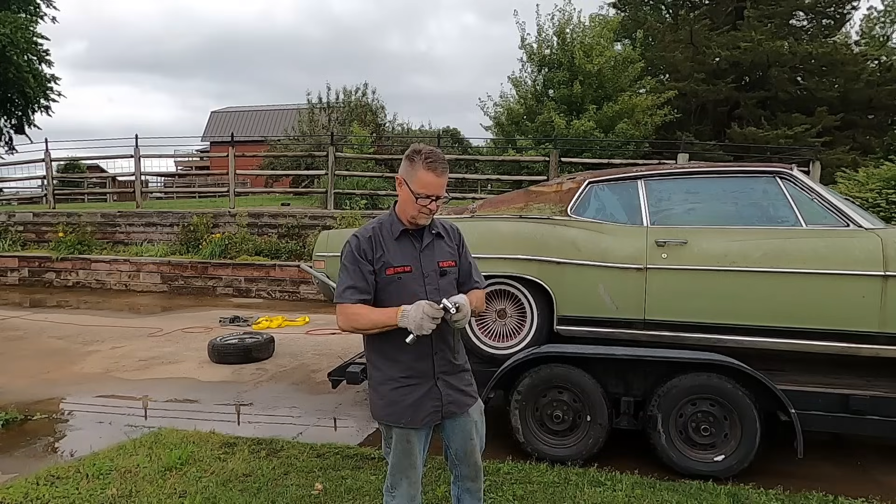It's got a screw in it. Doggone, it does have a screw in it. It's okay, it's all right. Don't cry, I was gonna cry. It's got a screw in there.

I need to tell you what, I'm gonna get these tightened up just with the way it is here. That ought to hold, and then I'll get this tightened up in a while.

This one down here is being not so nice. You know what, I got 4 of them on here good. Well, I thought I did. All right, we're good. Hey, is that rear end supposed to have that much play? I don't know, we'll be looking into that.

All right, hopefully I can get the jack out. Come on, baby, look at there. All right, folks, let me get the ramps out here and see if gravity's gonna take this off.

All righty, Street Rust special. You know what, so I got the winch hooked up still, and as I push it backwards, I'm gonna control it with the winch. I'll be checking to make sure we're doing okay there. Worst case scenario, this thing goes rolling into that Mazda, which gives me an excuse to get it out of here, but it's not mine, it's Gabriel's. Anyway, let's get this thing off, okay?

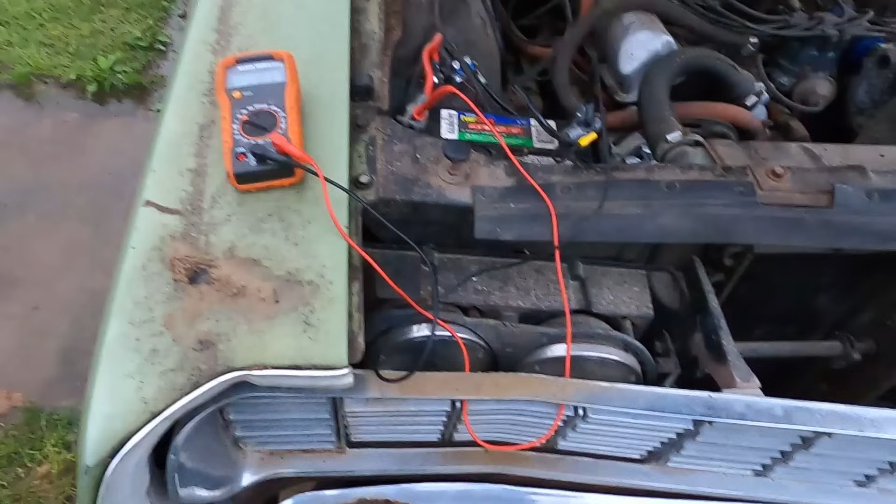We're gonna get back on this tomorrow, but hey, this battery, I've charged it for an hour. I mean, it was at 4.5, now it's down to 2.8. So we're not gonna get this done because I'm telling you what, it's coming again.

So what do we got? We got the Galaxie down. I gotta real quick get this buttoned up, get the tarp back on it. I've got the Mazda there that we're gonna move down below to the other shop, let Gabriel rebuild the engine till his heart is content. So anyway, we will definitely be back on the Galaxie here, okay?

I said Galaxie, it's not a Galaxie, it's of the Galaxie family. It's a 1968 Ford XL. Anyway, we'll get back on this.

Hopefully we'll get a break in the weather tomorrow. I'm off and I'll get all the cars rearranged and we'll get this bad boy going.

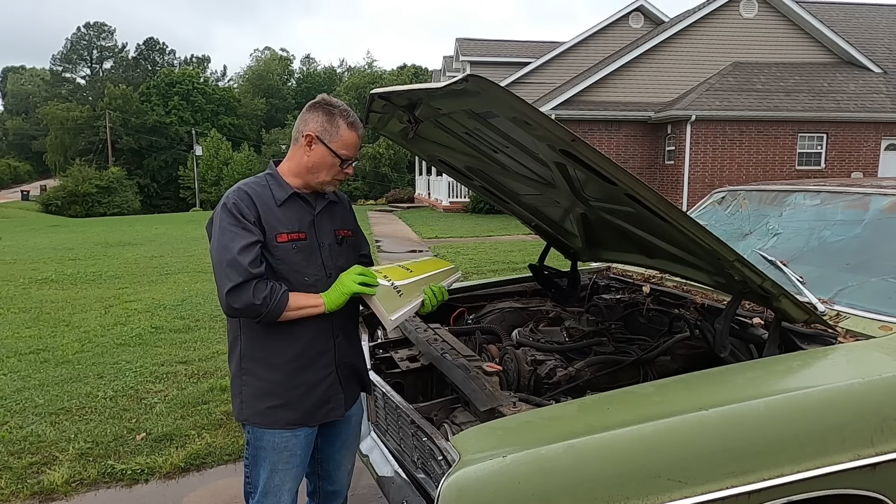So I've recommended, go to Rock Auto. This is the 1968 Ford and Mercury shop manual, a reprint, was 40 bucks. The one for the 1970 F250, I bought the jump drive, was like 20 bucks. I got all the manuals. The information's out there. So we're going to take a look at a couple things here real quick.

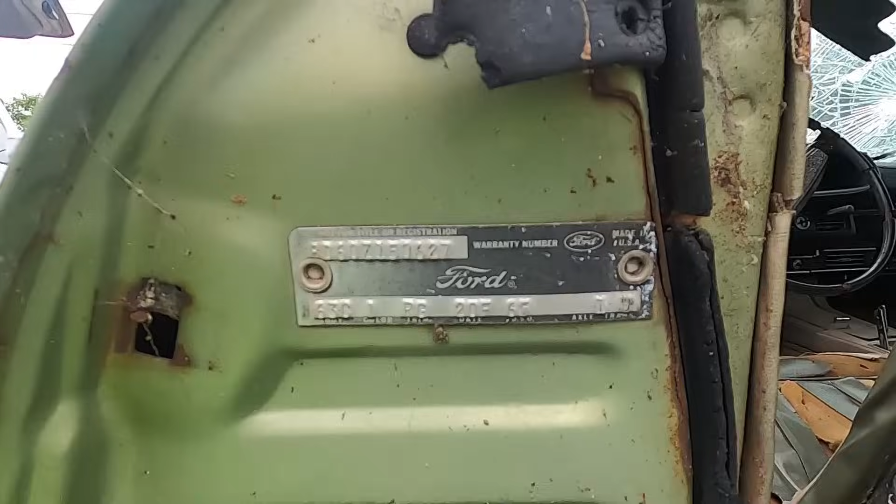I've been under it, I've been in it looking at numbers. So let's look at our VIN right here. Okay, so there's our VIN plate: 8D60Z. Z is a 390 4V, not a 4-valve, but 4V which designates a 4-barrel.

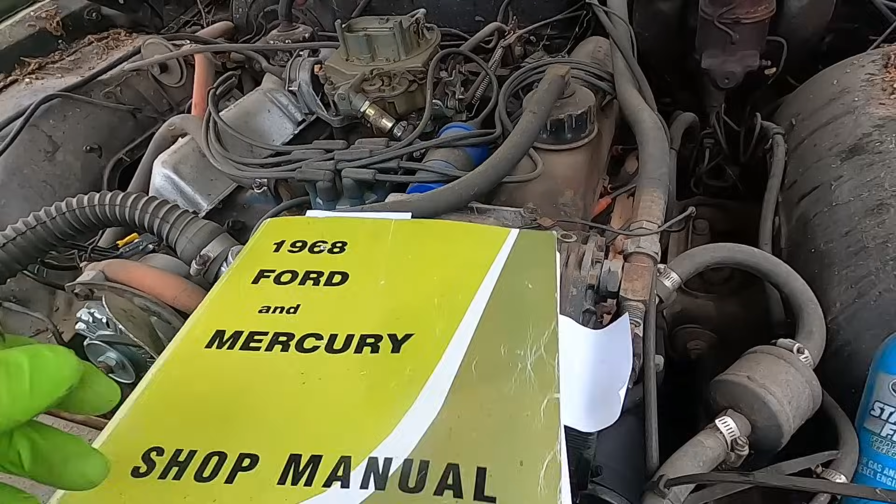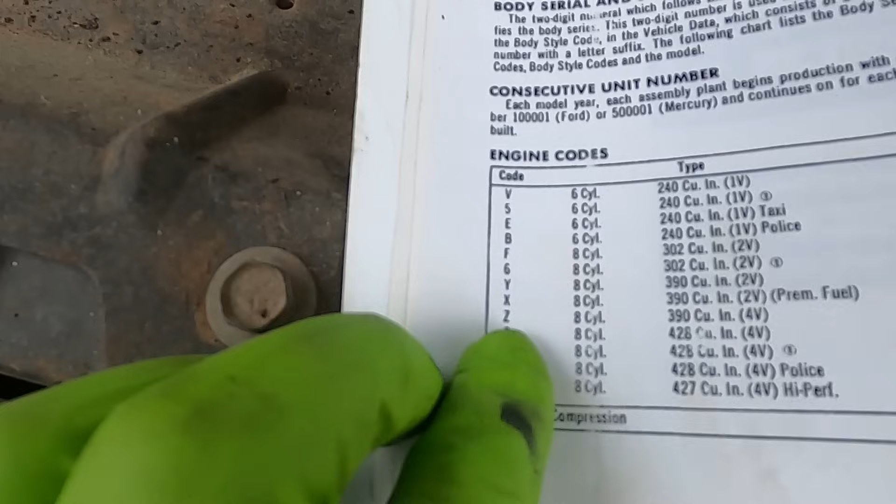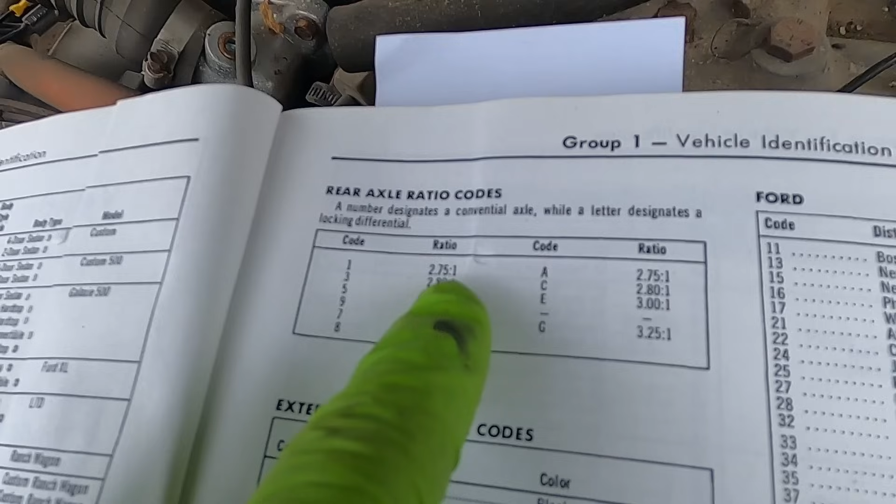And the axle is a 1. Now the 1 does not identify the type of rear end it is, it identifies the ratio. Okay, so with all that in mind, within these great books you can find things like what all that means. And we know that the engine code for a Z, which is right here, is that 8-cylinder 390 cubic inch 4V, which is a 4-barrel. Okay, now rear axle code, we saw 1. A 1 is a 2.75 to 1 ratio, so those are highway gears.

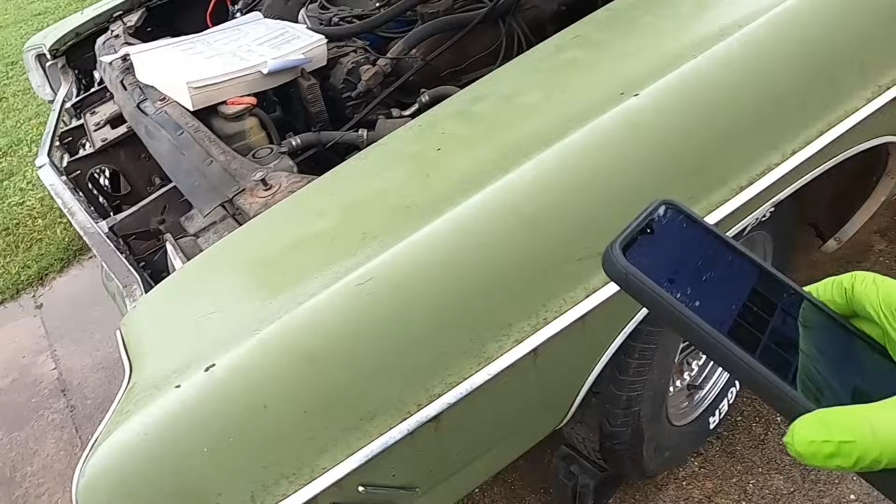I got under there, I found the code. Let me get my phone. I got my temporary garage set up over here because it's been raining. So looking at the code, it's going to be difficult to see in this, but that first letter over there is a W. It's a WDC CA.

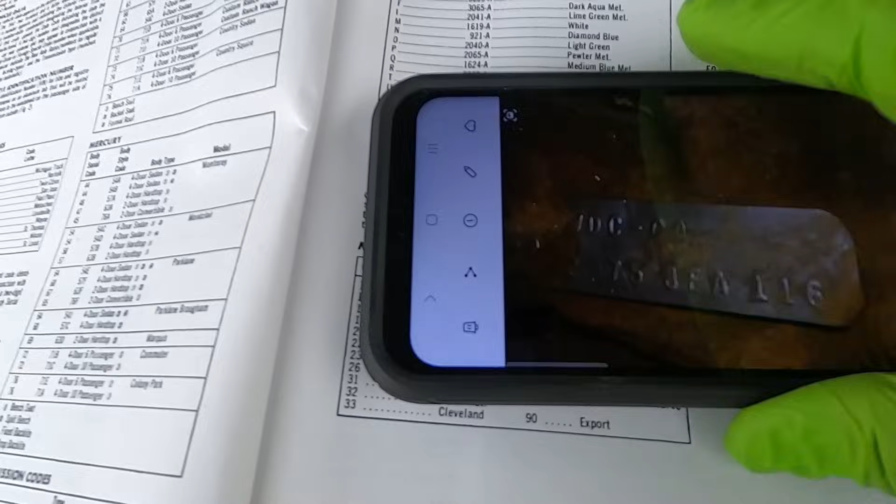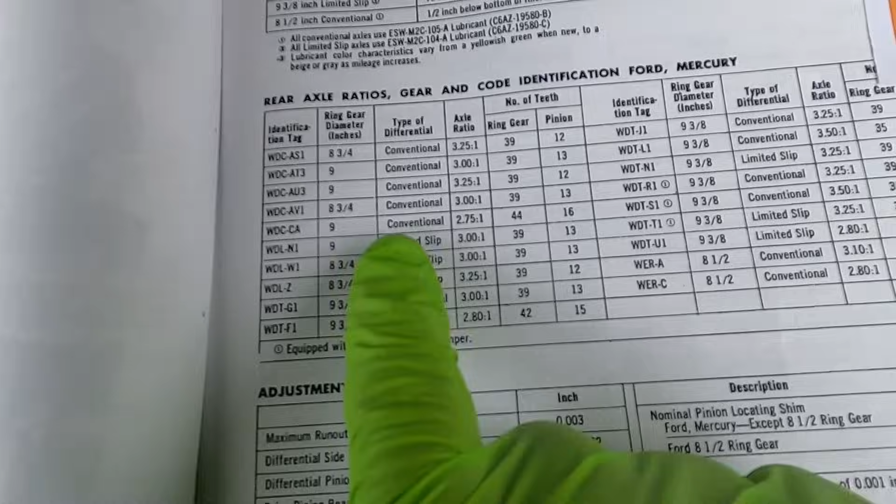So when I go over to look at the types of rear axles, a WDCCA, it is indeed a 9-inch. I knew that from looking at it. And it's got 2.75, but it's conventional, it is not a limited slip.

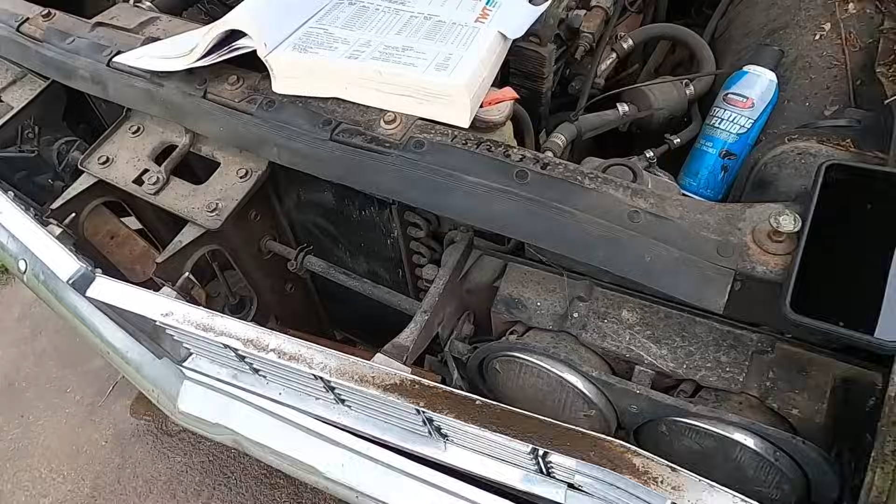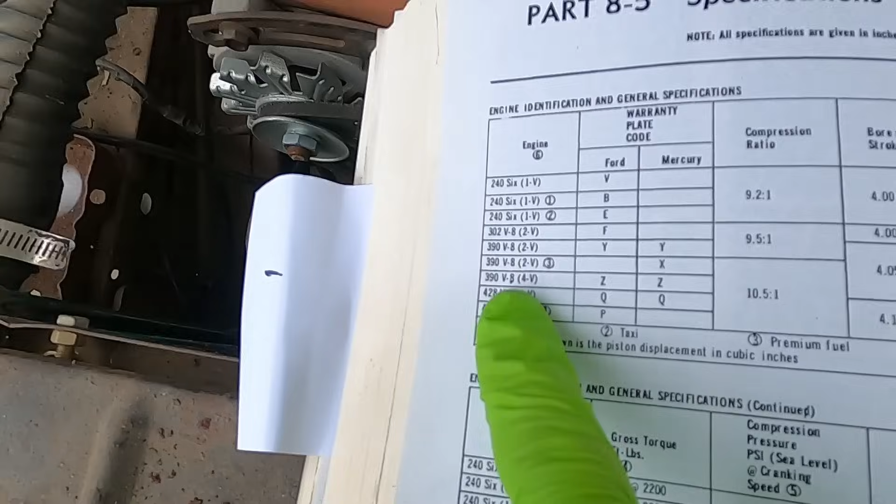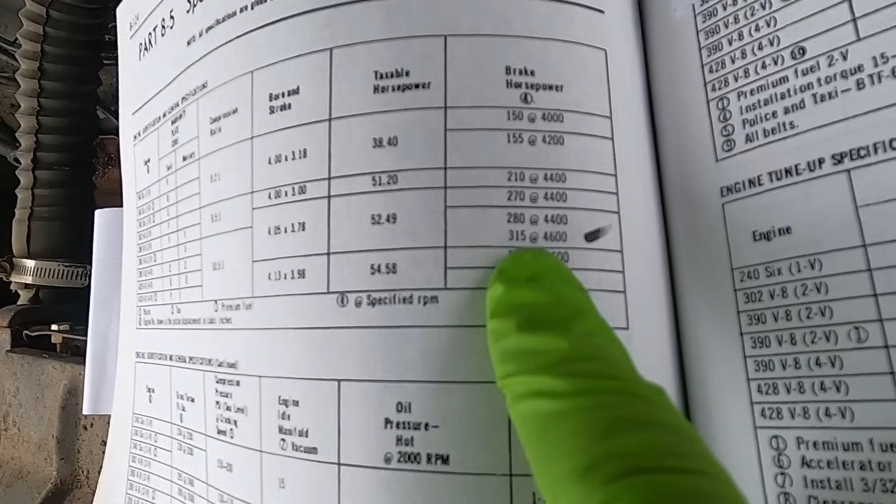So we have a 390, which is a pretty good engine. Let's look at some specs on that engine real quick. For the 390 V8 4V, compression is 10.5 to 1, 280 horsepower at 4,400 RPM, and then 315 at 4,600 RPM. Then we also know the firing order, 1-5-4-2-6-3-7-8. We know it's the same as a small block 302.

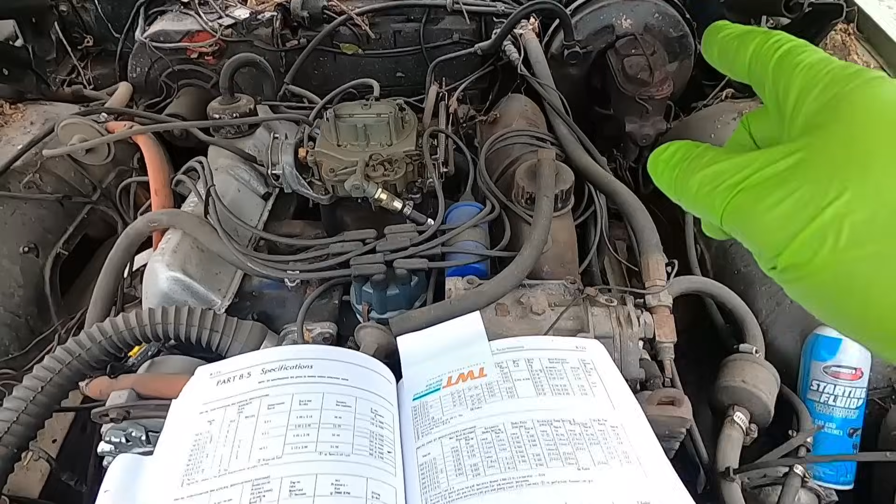You have 1, 2, 3, 4, 5, 6, 7, 8. Distributor, the firing sequence is 1-5-4-2-6-3-7-8 going counterclockwise. I have it written here, and I have it written here, and I have it written here.

So without further ado, I got a new battery right there, and it is starting to spit and sprinkle. Let me tell you what, you don't need to see me put a battery in. Let me get the battery put in before I hook it up. I'll get you back over here.

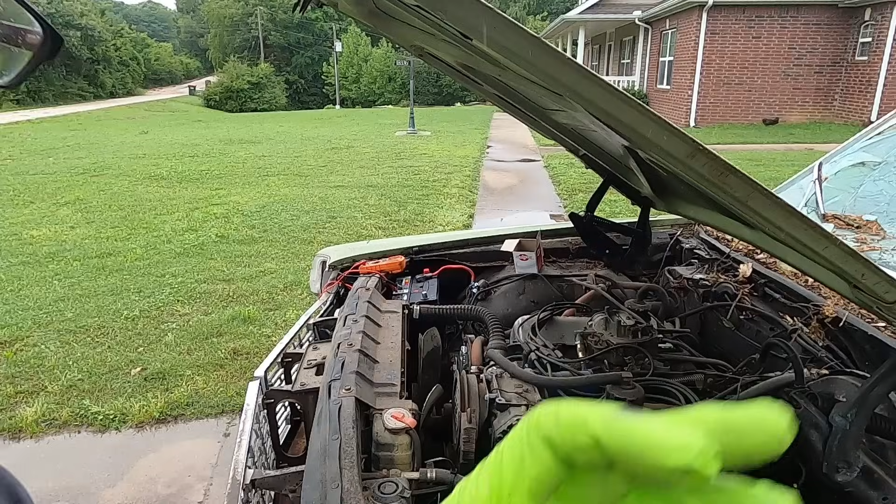Alrighty folks, it's starting to rain. It's kind of misting. If it rains, we're gonna stop for a little while. I thought about buying one of them canopies today and I didn't do it.

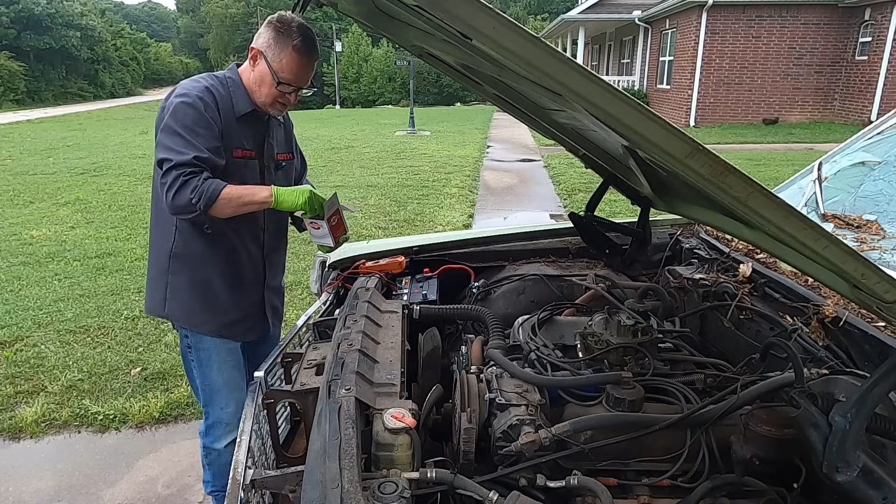Hey, first of all, if you notice in the first video, these little terminals here are supposed to be little push-on things, right? But there were just some wires wrapped around there, so I went in and put some ends on there. That's why I don't throw away these old pieces, I keep them because when you're in a bind and need that little part, there it is.

All right, so you guys are just going to have to trust me. I've got 12.88 volts on this new battery.

Haven't hooked it up. Let's pull off the fire protection device. Well, we're just going to connect it here, we're going to do the fire test. This ground cable is about, look at that, doggone, could fit in the trunk. We're going to try to keep it out of the way here, don't get it caught up in the alternator or anything. All right.

Just look for anything sizzling. Let's make sure we got voltage here. And we do, 12.88, so we're good there.

I tell you what, folks, I'm going to go in. I got the screwdriver in the ignition. I'm just going to see if it'll bump over. We'll see what we got. Oh, look at there.

You know what, folks? This may be the easiest start we do. We know the fella had this engine running. I know it was running, I saw it running because I rebuilt this carburetor. That's a 4300 Autolite. I also know you're going to hear it had a pretty severe exhaust leak on this side. We'll look at that in a minute too.

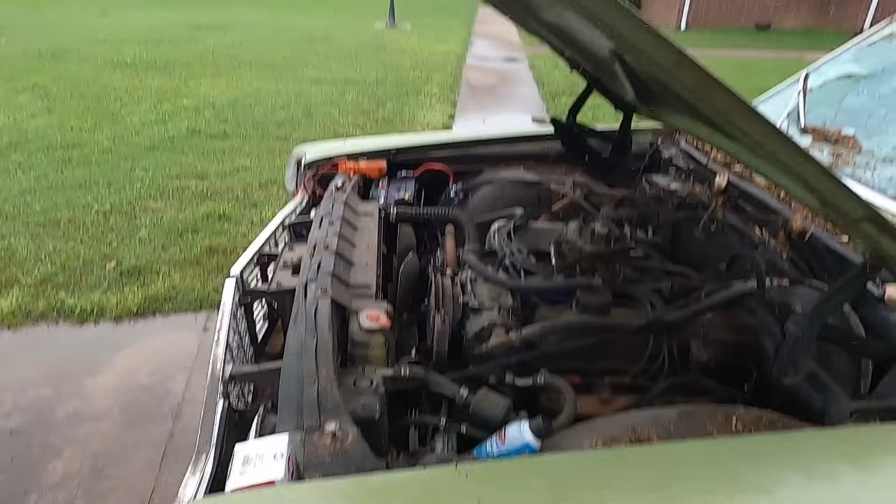So I don't even know if there's any fuel in here. Let's look inside. Do we got lights or anything like that? Doggone rain.

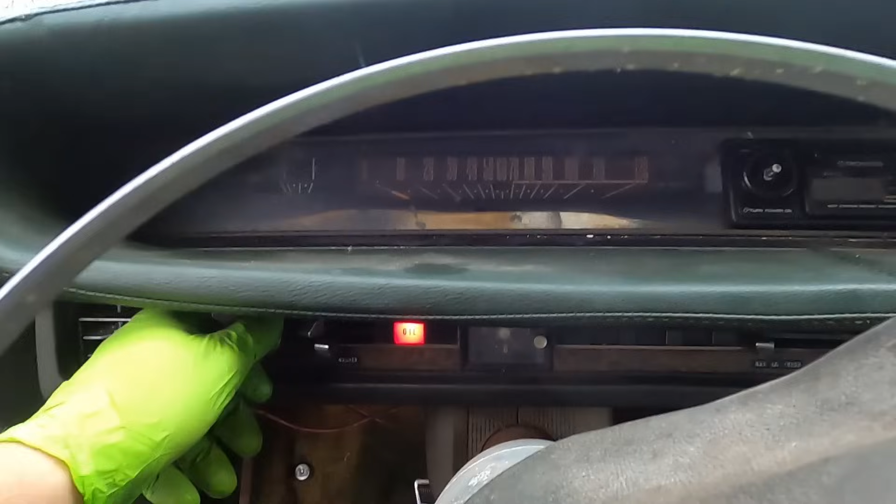Let's see, if I turn the ignition on, I got an oil light, that's about all I got. Let's see, does anything happen when we do this? Oh yeah, brights are on. See that red? What if the headlights are on? Let's look, this is fun. Oh, let's look and see if we got tail lights. Looky there, got one. All right.

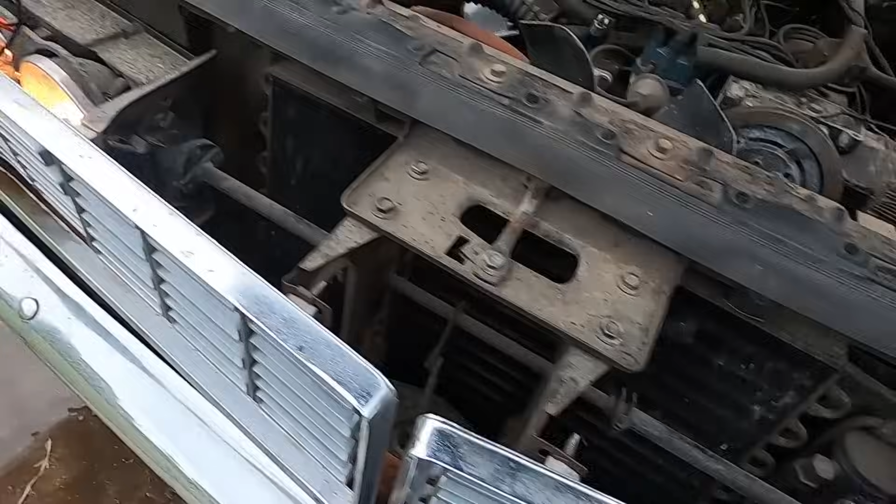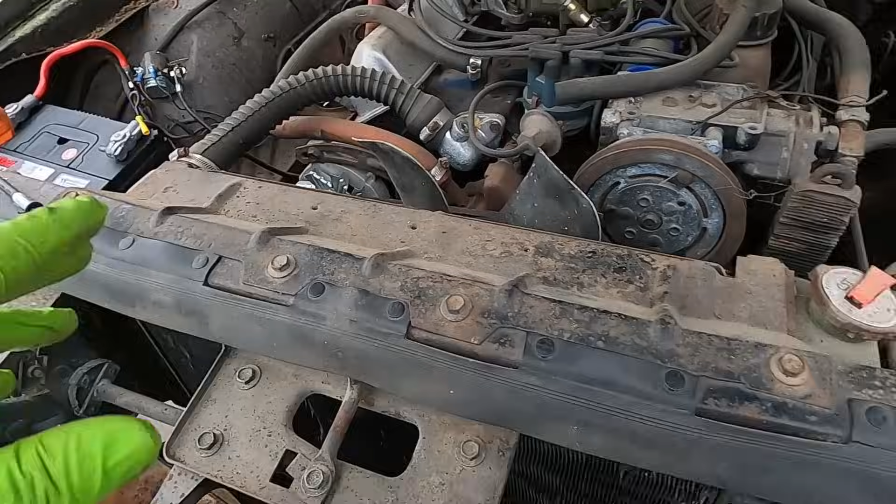Oh, look at them headlights. Now I'm sure I don't... these are vacuum operated. Let's see, things of that nature. So I'm sure there's a vacuum reservoir down in there or something. We'll figure all that out. First we got to get this thing running.

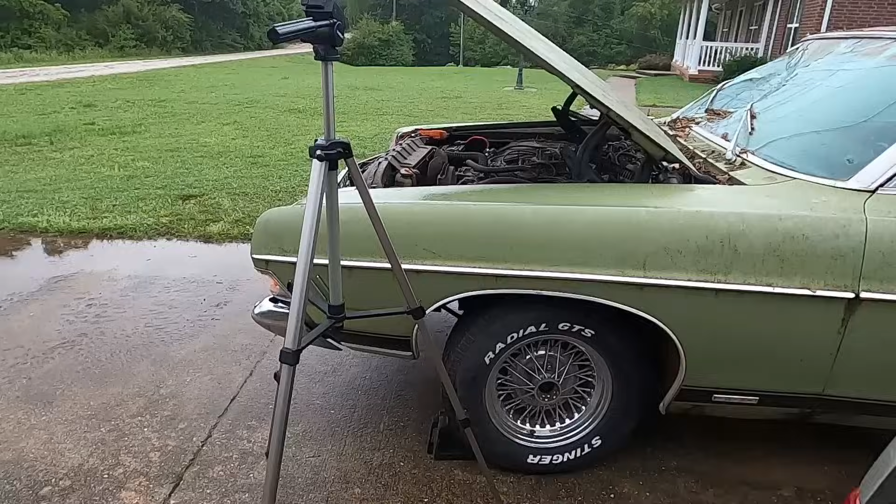But I'm telling you what, folks, it's starting to rain again. So I'm going to pause for just a couple minutes. We'll be right back. Oh, I wanted to look at the fuel gauge before we get back. Plus I need to turn the headlights off.

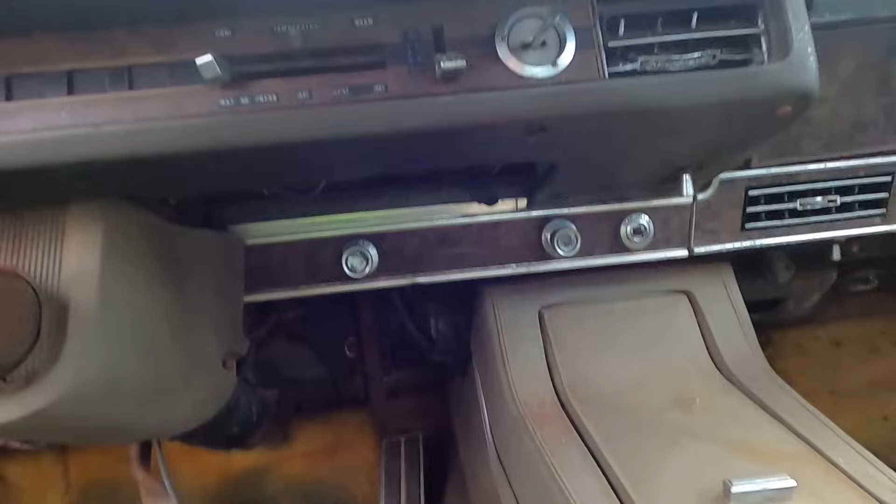Okay, I wonder if the windshield wipers work. Not that it matters. Washer, I don't know. Do we have hazards? Where's the hazard lights? I don't know nothing about this car, folks. Motor, no motor. Okay, so I don't even know what all this stuff is down here. Lighter fluid, rear speaker, right air. We ain't even looked in here, we got to get in here and look around. Air.

Well, that's all we got for right now, folks. I'm going to kill this. We're going to take a break till the rain stops, and then, oh, fuel gauge, that's what I was looking at. I know it's got a new fuel tank in it.

Come on, come on, got my master key here. Oh, didn't mean to do that. I don't think that sending unit's working. I don't know if there's any fuel in it. We'll give it, you know what, let's just give it a pump, a couple pumps. Just for fun, folks, let's see if there's anything in there.

No, there ain't nothing. Tell you what, let me... I'm gonna do it. Nope, we're stopping. See, I'm gonna ruin my camera and everything. So folks, I'm gonna let this rain settle down. It's not raining hard, it's a light rain. We'll be back, it'll be just a millisecond for you.

Alrighty folks, it is the next evening, and as you can see, it's been raining. Yeah, let me let y'all see, get a shot up yonder in there. Look at there, it's probably fixing to start raining again. It's been raining for many, many, many days. Anyway, I gotta get this thing moved. Here's what we're gonna do, I'm gonna get you in here a little closer.

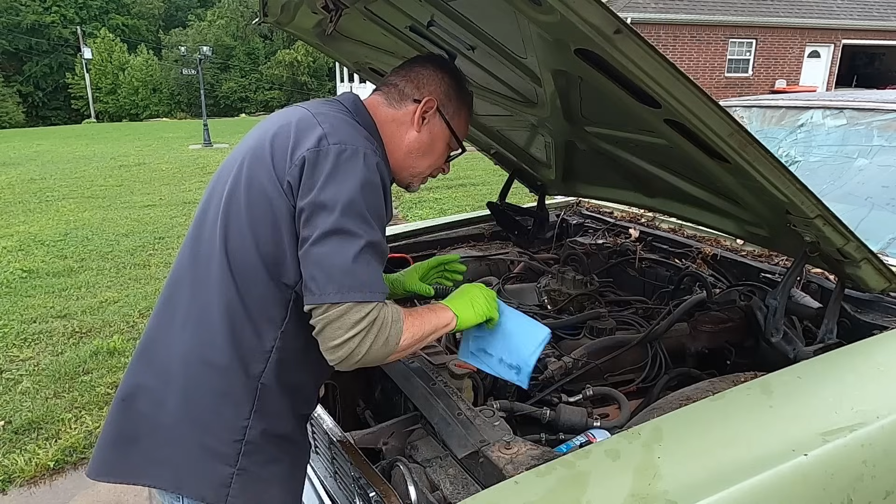There's something jacked with the switch. We'll mess with that, but I want to check the oil real quick. We didn't do that yesterday. Let's see what we got. There you go, it is full. There's no problem with the oil level. No milkshake going on in there.

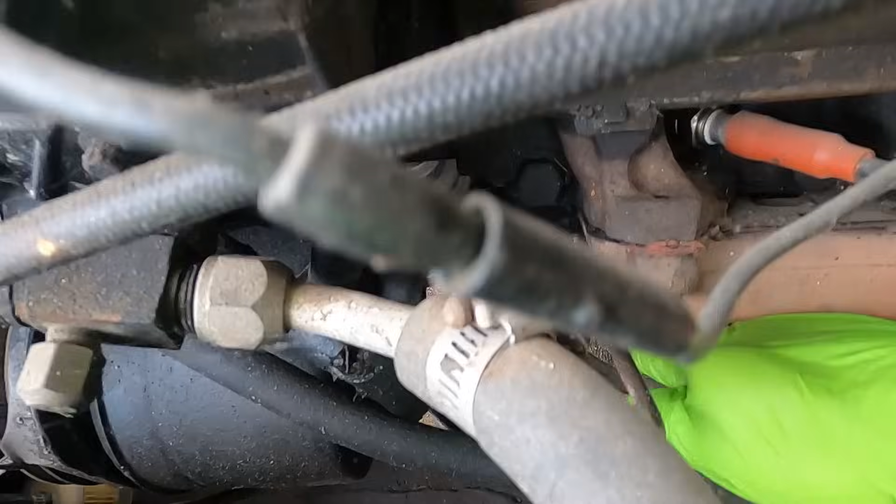What I did notice in here, we'll get it started, but before I try driving it, let me get you in here so y'all can see. All right, so right down yonder is a power steering hose that's supposed to be hooked up right there.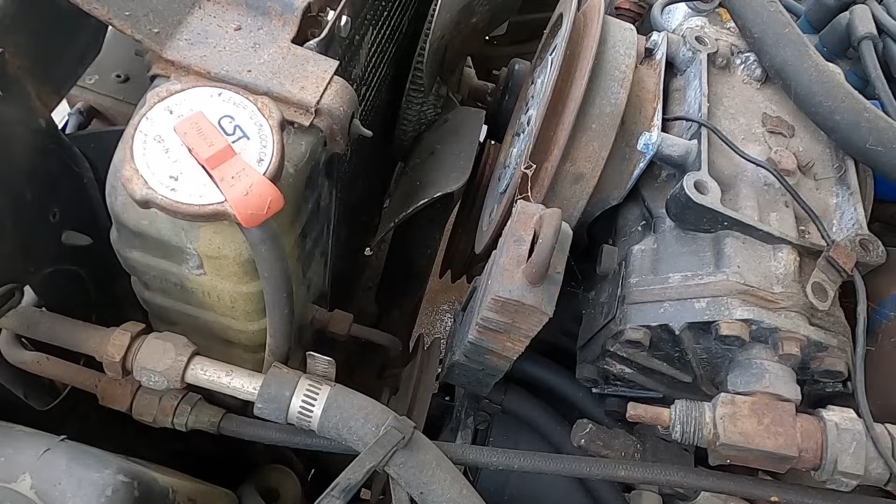Now, this is pretty cool, it's got a power steering fluid cooler. That's pretty cool, but this thing's got to go. Number one, it's a boat anchor. I can take this off, throw it in the trunk, save it for the next person, but you can't even check the fluid. Look at there. How are you supposed to check the fluid right there? You can't even get it out of there. Something ain't right, and I'm gonna have to dig into that a little bit.

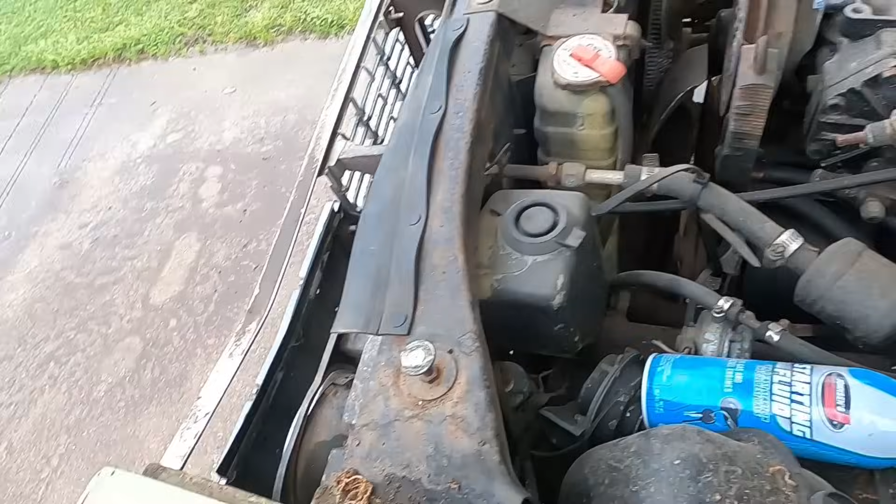So we ain't gonna have any power steering. But nonetheless, I didn't even check the doggone radiator fluid, it was just raining, I was miserable. I know he had fluid in here at one time. Woo, if there's any in there, it ain't in there now.

So let's just see if we can get this thing to pop over. Then we'll come back to the fluid. Hopefully we got spark, thing's been sitting for a while. Let's go ahead and let me get the ignition turned on. We'll give it some go juice down its throat.

Remember, we got no keys here, folks. Doggone, my remote key, let me get my remote key here. Let's see, that's the trunk key. Let's see if this is the ignition key at work. You guys know I'm kidding, right? You can't see me, but it's a doggone screwdriver.

All right, tell you what, let me take you along for the ride here, so you're not lonely. That one, believe it or not, it's not going to work. Which one did I use yesterday? That's the trunk master key right there, I know that one. Now let's give this big one a whirl here. We'll roll down the window. At least it works.

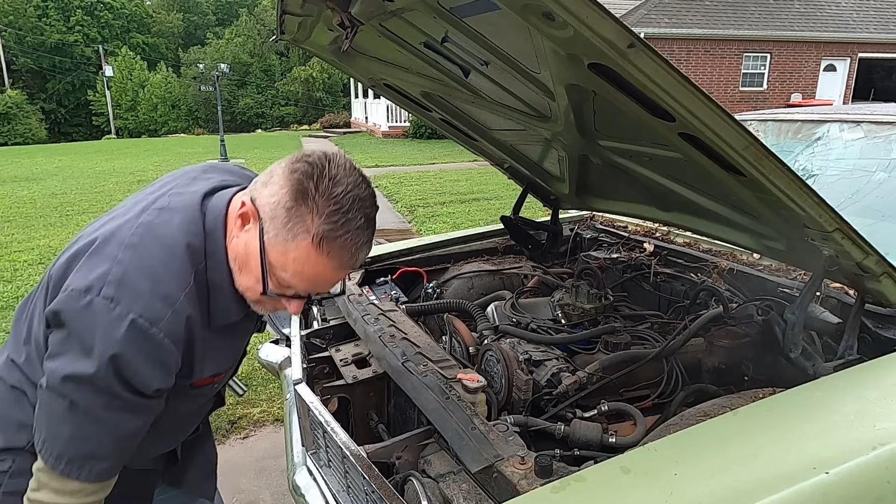I wonder if it's got any fuel coming up in there yet, probably ain't cranked enough. We'll give it one more shot, then I'll fuel her back up. Nope, okay. Here you go.

All right folks, I want to see if I can get some fuel coming out of here. Let me go get a nut driver and a bottle. I'm gonna disconnect the fuel right here. Boy, that hose is brittle. I may have another hose in there too. So I'm gonna go ahead and disconnect the battery for now.

Turns over, now we knew that, folks. My video, I can't remember, I'll have to go back and look. I don't remember if it was last summer or the summer before I rebuilt this carburetor. This 4300 carb is rebuilt, but it's kind of a dog. This first came out in 1967, and they used it on the 390. It had 414 CFM, I think this one is just a little over 500, so it's way undersized for this motor. We'll worry about that down the road.

And the other thing I recollect when we rebuilt it, your throttle adjustment, well there's this stuff all in the way here. What is going on here? There we go, that coil wire was in the way. The throttle, that's the kickdown. I think there's this, oh, it's done broke off, the throttle adjustment screw. So we got some work to do, folks.

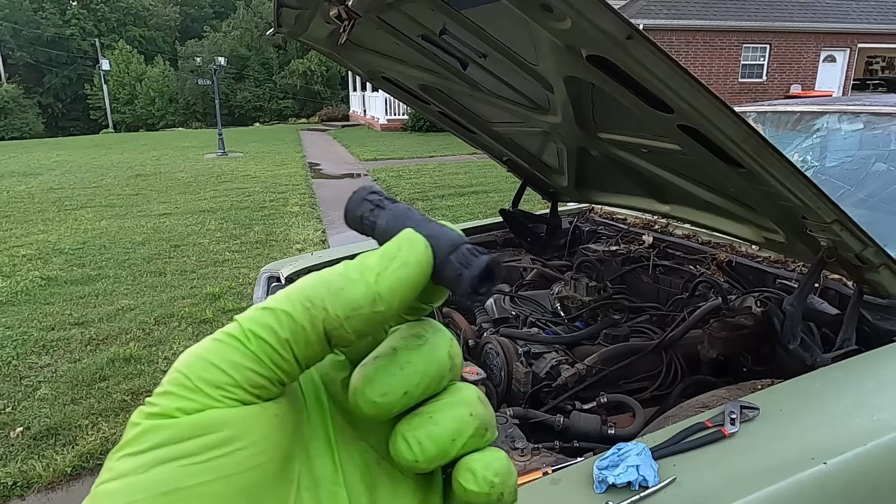All right, so here's the remnant of that little piece that goes between the filter and the metal fuel line. We're going to put in a new one. So tell you what I'm going to do folks, you don't have to watch me do this. I am going to heat this up with the glue gun, heat it up with the heat gun a little bit to make it a little more pliable, because there's not a lot of room to get that on there. So I'll do that and we'll be right back.

All right, that didn't take too long. We got that new hose on here. I wonder if we got anything squirting in there.

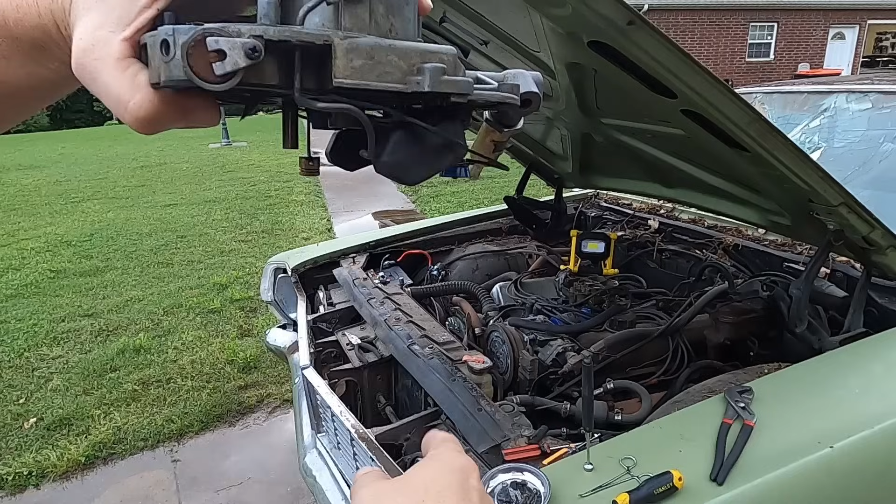All right folks, I got it apart. So this is a carburetor where the floats hang down, not in the bowl and come up. Those seem to be doing okay, but this needle and seat right in there, it's hard to see, I know the lighting out here is terrible. You know what is sticking? Well, we'll put that back later, I know where it goes.

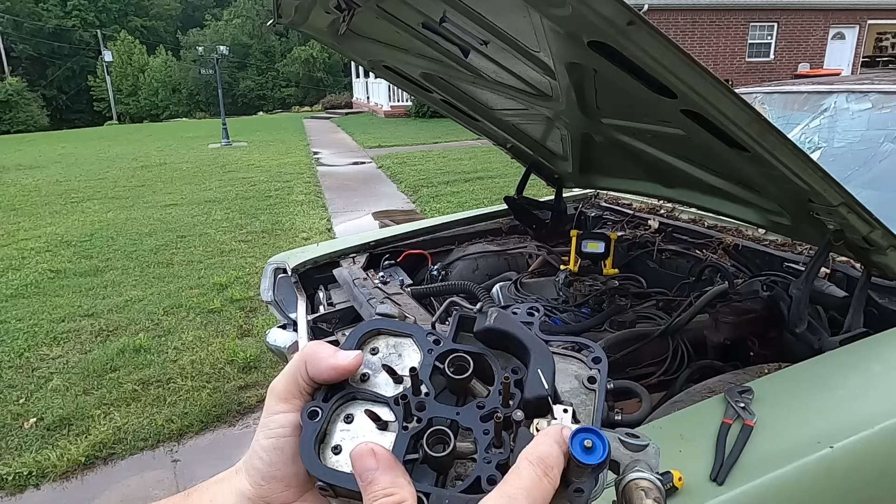Anyway, it's sticking up in there, so maybe when it's coming out, the float's stuck and won't go back up in. So I'm gonna go ahead and pull this pin and check that out, and we'll see what we got.

Oh, this little thing here, I forget what this thing's called. I call it a little baby piston. It goes in here, it's a little plunger. All right folks, let me get this apart. Be back in a second.

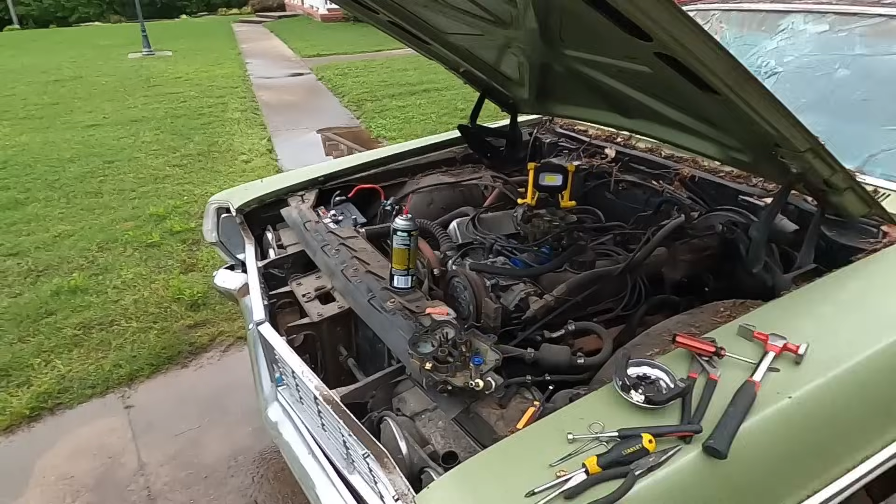All righty folks, let me tell you what's going on. Let me get you over here. This is brand new, I mean it just sits in there, no problem.

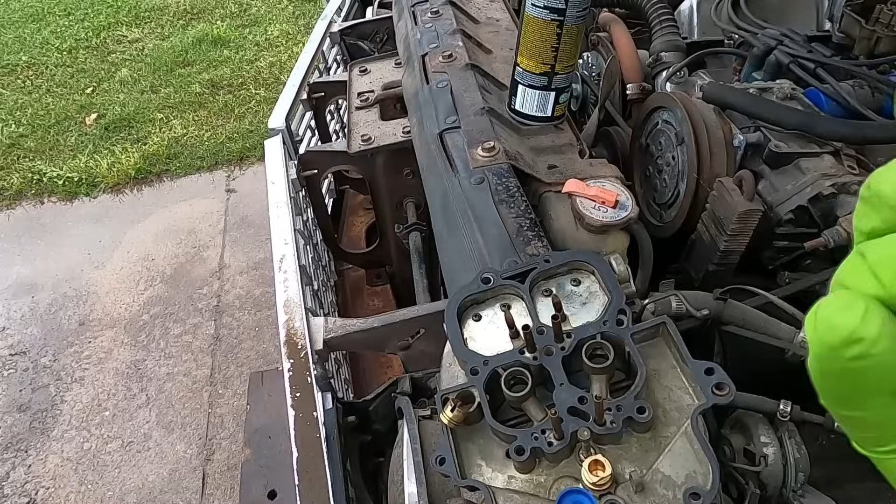So if I shoot fuel in here and the seat is closed, it could be coming through this auxiliary valve right here, which is this little apparatus right here. And what I noticed is that this goes up and down in there. Watch this little piece, looks like a Schrader valve, it goes up and down. And it was pushed through the bottom and it wasn't moving.

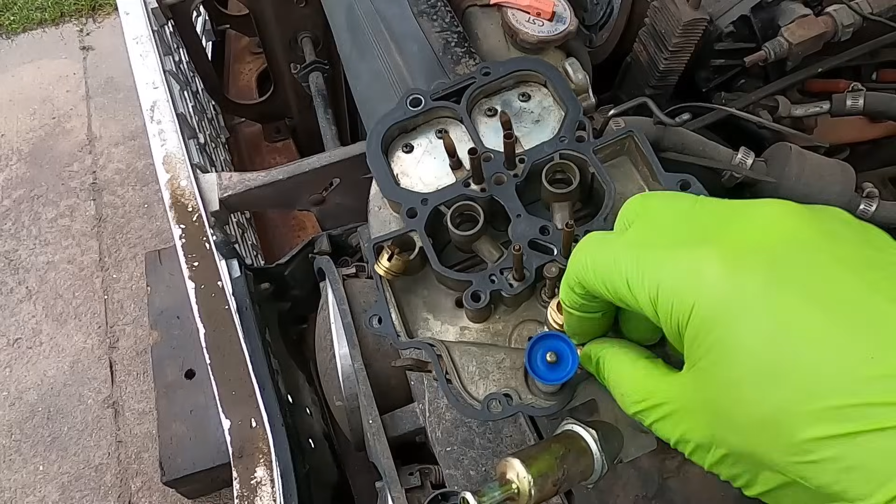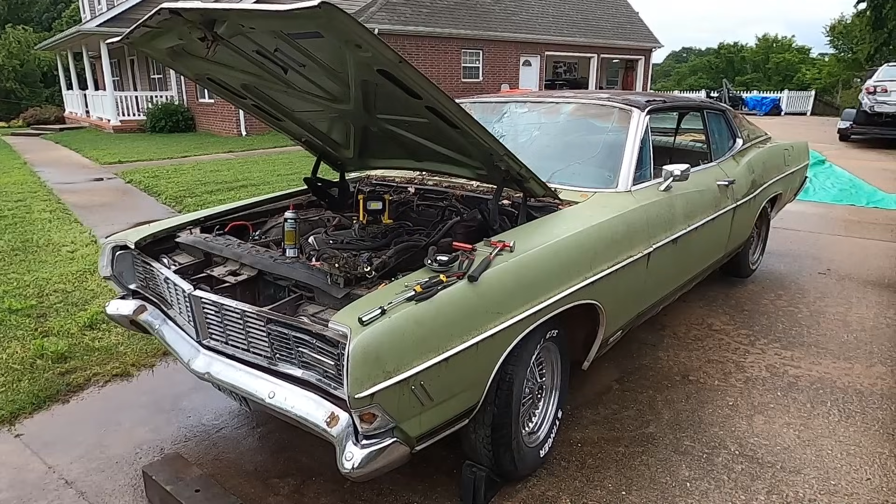So I'm gonna get that back in there, sorry folks. Because what I noticed, I'm gonna get you back on the stand here so y'all can see this, okay? All right, so let me get you where I can do some spraying.

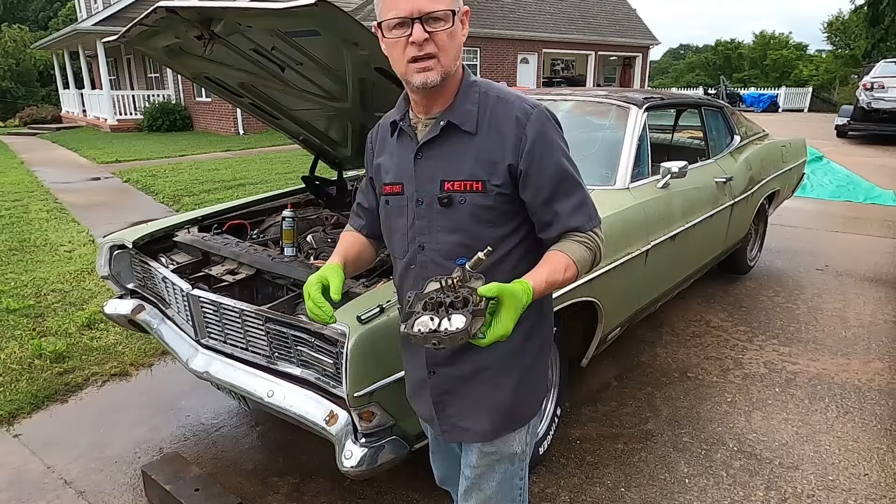So what I noticed was there was fuel coming through here when I had this plugged. That shouldn't be happening, and I think that's what flooded it. Now how did that happen? Did that get stuck? I don't know. The fuel looked good in there, I'll show it to y'all here. It's not bad, I mean shoot, I've run worse, guarantee it.

So fuel comes in. See, it's coming out right there. That can't be right, folks. That's what's flooding it right there. Why is that doing that? Unless that's supposed to be pressed down. Let's see if that helps any. If that is pressed down beyond that metal piece on the bottom, I know y'all can't see what I'm doing.

This is part of the deal though, folks. I ain't got time to, I don't have another 4-barrel. There, now I've got it pressed down in there, and let's see what it does. Y'all can see, I want to see if there's fuel coming out that. And it is. So all right, let me pull that.

Well here, let me pull it off and show you what's going on here. Now, I didn't have it on there super tight, I don't think you need it on there super tight.

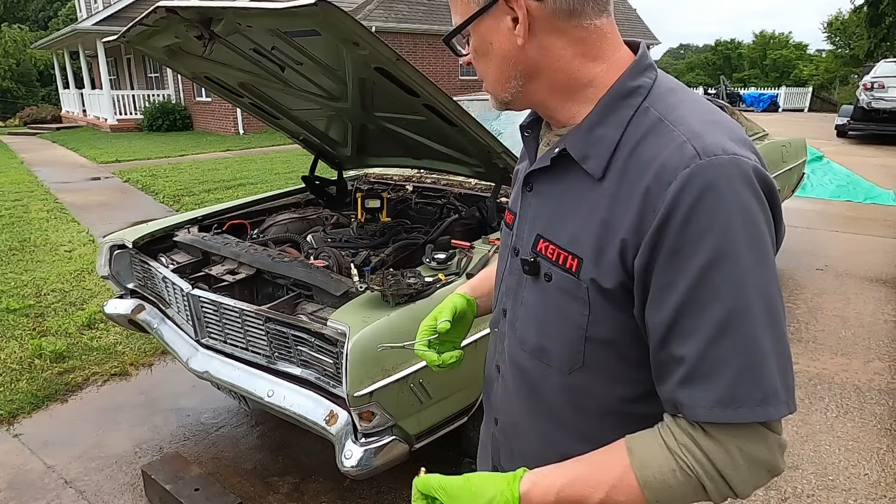Come on now. You know what these are for, folks? Not what you think. They're for fishing and carburetors. Stay away from that wacky weed.

All right, what was I doing now? Y'all got me sidetracked. Okay, let me get the tweezers on this, I don't want to drop this. All right, so there you go right there, that little piece right there. Let me make sure y'all can see that okay. That little piece right there, that plunger goes up and down, it's supposed to block that. Now if it's inside of this, it sure ain't going to do that.

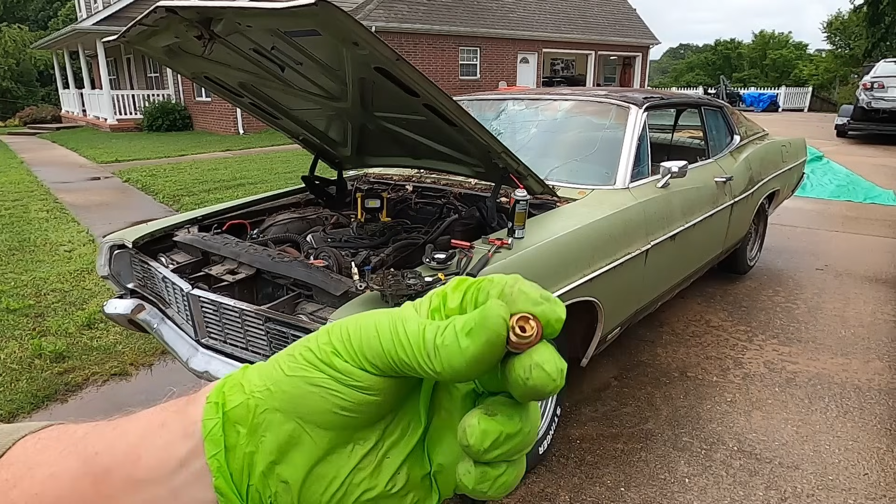Maybe it's supposed to set free there like that. Let's try that and see what we got. But what in the world? Okay, so you know what, that's what this little arm is for. Oh no, yeah, I wonder if that, you know what? Let me tinker with this for a minute, be right back.

All right folks, so here's the confusing part. The confusing part is, hope y'all can see me all right, I'm umming a lot. The confusing part is we ran this, you can go check the last video and it ran fine. But it's pretty obvious that this auxiliary valve right here is what's flooding it, because the seat's working fine with the float.

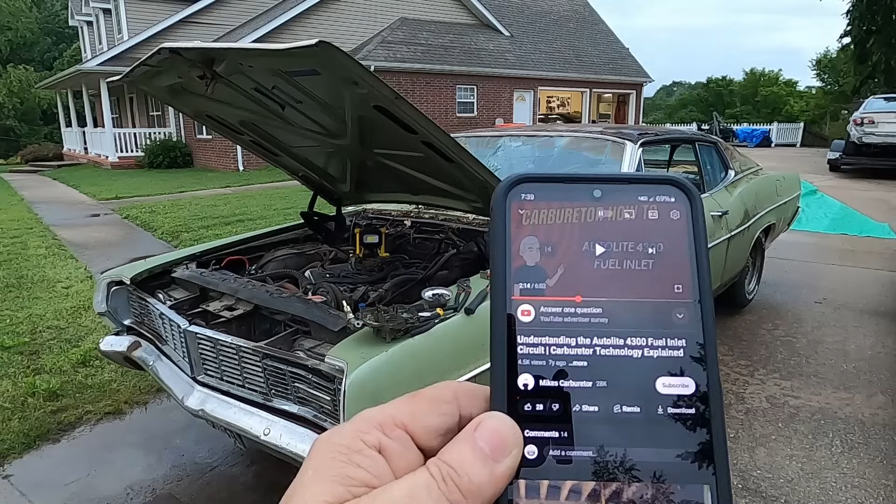Go check out Mike's Carburetor, there's a good little video he's got on this exact issue. Let me just show it to you here real quick. Okay, let's see, can y'all see that? Understanding the Autolite 4300 fuel inlet circuit, carburetor technology explained. Mike's Carburetor didn't let me down.

So anyway, what they found is that when you don't have enough fuel, this is supposed to let more fuel in, but it lets too much fuel in. Ford figured it out, and they actually have a plug that can go in there. I don't have a plug, so I'm gonna run down to Tractor Supply and see if I can find a plug to go into this. Okay, it's a 3/8 by 24 thread. I don't have anything. I thought about just cutting off a bolt and putting a slot in the top so I could screw it down in there, but I absolutely don't have anything that'll fit that. I've looked around, so hopefully tonight... what time is it?

There ain't no sun, so I can't measure like Derek and see how much sunlight I got. It's 7:40, I don't have much time, probably got about 40 minutes. So let me see what I can do. Regardless, we'll be back in a second for you.

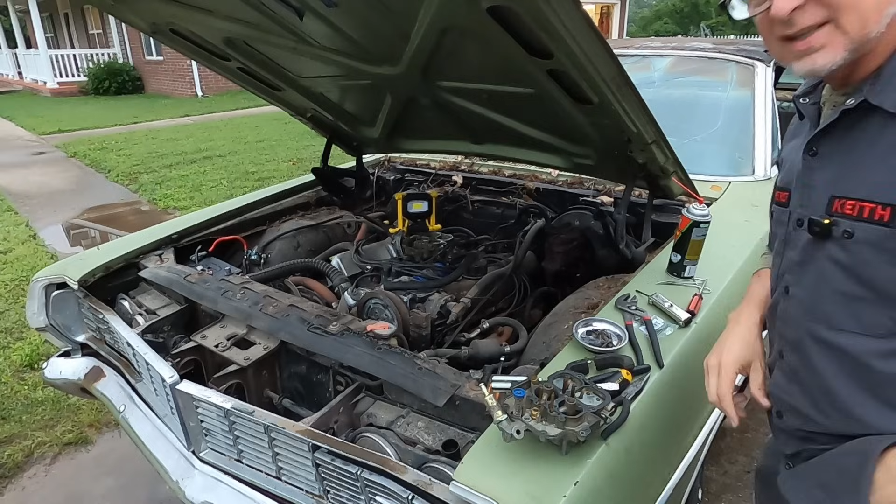Okay folks, we are quickly losing daylight. So to replace that auxiliary valve, can y'all see that? It's a 3/8 by 24. Believe it or not, Tractor Supply had this set screw, 3/8 by 24, $1.19 with tax, $1.30. So I'm going to go ahead and thread that in there. We're going to plug this bad boy up.

It's not in there right yet. Oh, that ain't the right one. Let's see what we got here. That ain't the right one either. That's the right one. I'm not putting any thread seal or anything on this. Gotta get it to start in there. It's the same exact thread, come on. There she goes, just needed a gentle touch there.

Okay, we're gonna call it. Now, when I spray fuel in here, nothing, when I spray carb cleaner, nothing should come out there, and it doesn't. It comes out there. All right folks, I may have to get some lighting out here. Let me get this carb put back together, then I'll come back and we'll get it started again.

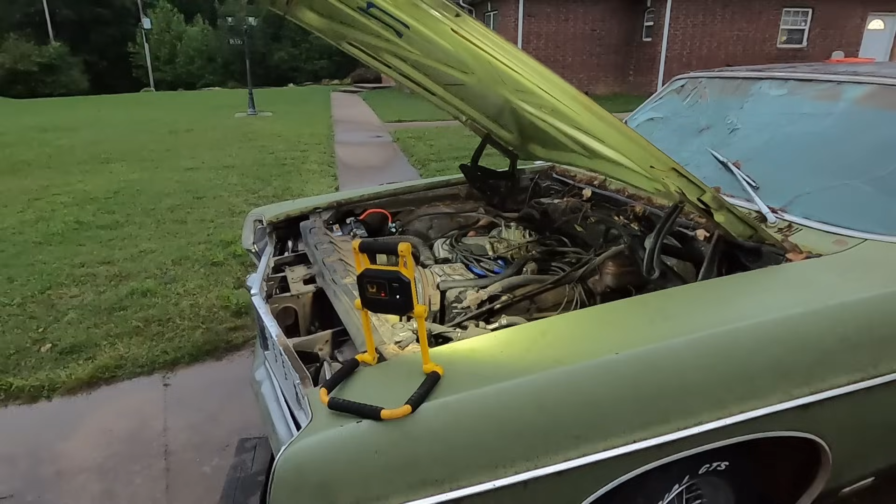All right folks, hopefully you can see that okay, looks a lot better on the camera, it's a lot darker out here. Anyway, carb's back together, the fuel line is hooked up, there's fuel in the bowl, the ignition's on.

So hopefully I can turn this thing off if I need to. So let's see what we got.

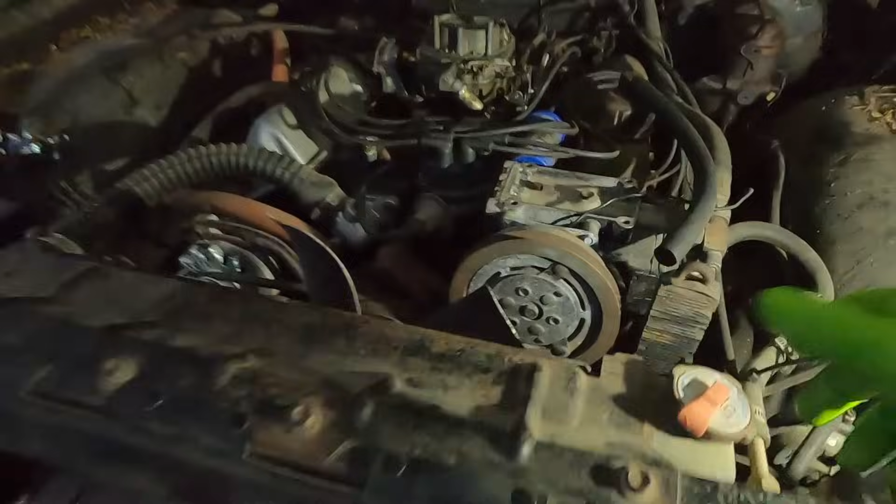All right folks, we are quickly running out of daylight, but got the water hose out here. Let me get this off. That's what it's all about. These are the things I'm going to write about in my book, Memoirs of a Shade Tree Mechanic in the Boston Mountains of Arkansas.

Anyway, hey, carb is back together, and it's full. You guys, I don't know if I showed you there or not. The bowl is full of fuel. The ignition is on, we could start it from in there, but not going to.

Ooh, what's that other pretty light? Alternator. I wonder if the alternator works. I need to go grab my meter. Do I have my meter? Oh, I got my meter. We can check that here too. All right, let me get the meter set up here. I'd like to check that.

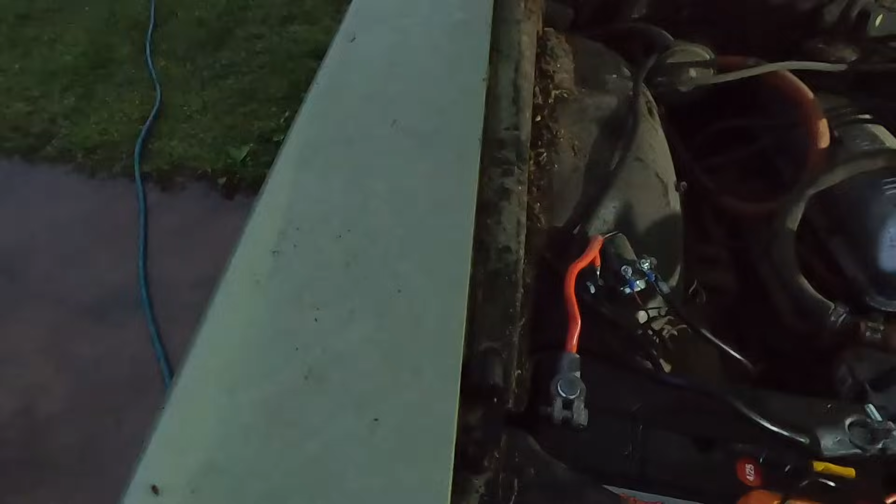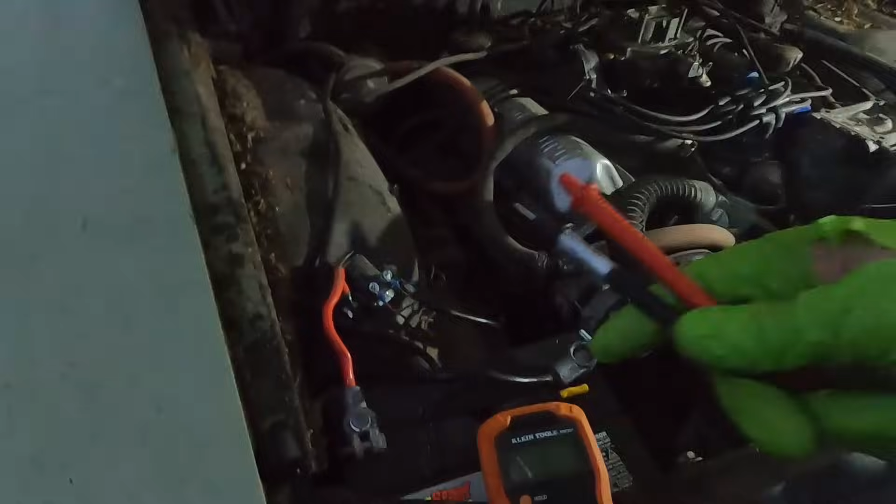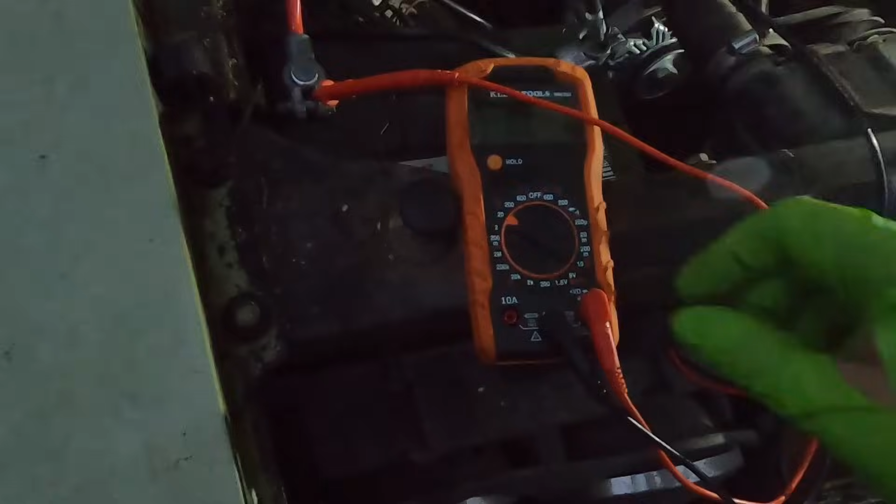You know, doing stuff with doggone, sorry for the video folks, doing stuff with one hand is for the birds. Let's go ahead and just get this hooked up the best I can. All right, we're sitting on 12.4, so not too bad.

May not be charging. Okay, so let's give her a couple pumps. Now remember, it's not going to idle high. And I know it's dark folks, but that's the life of me. Oh yeah, I got to start it. All right, this thing should pop right over, let's go ahead and start her.

There you go, big time exhaust leak over here. I can hear it, we're going to have to figure that out. But hey, haven't checked the timing, plug gap, anything.

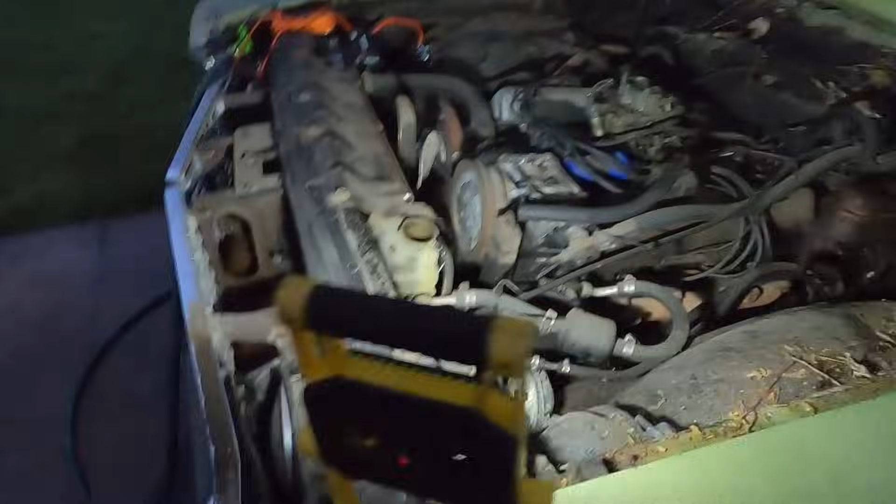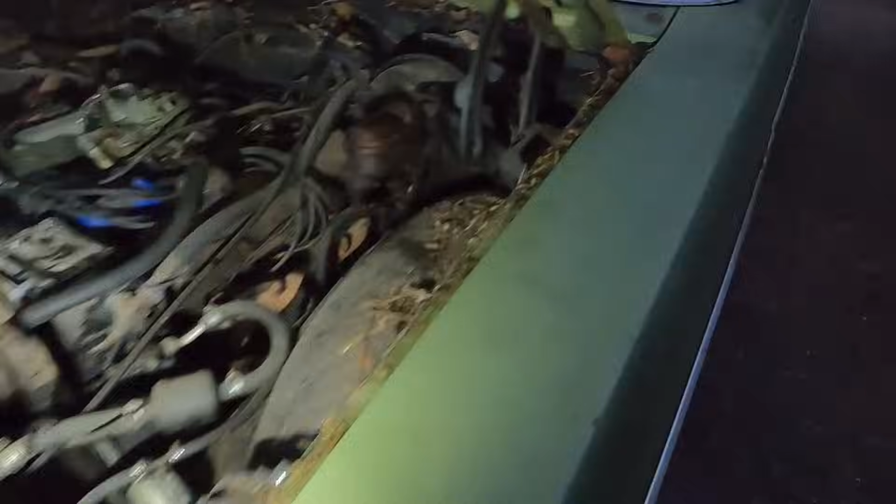Not too bad. Oh come on, come on, come on, come on. I hope we're not out of fuel, I hope we're not out of fuel. I don't know how much is in that tank. Where'd my key go, doggone it. There it is. All right, let's try her again.

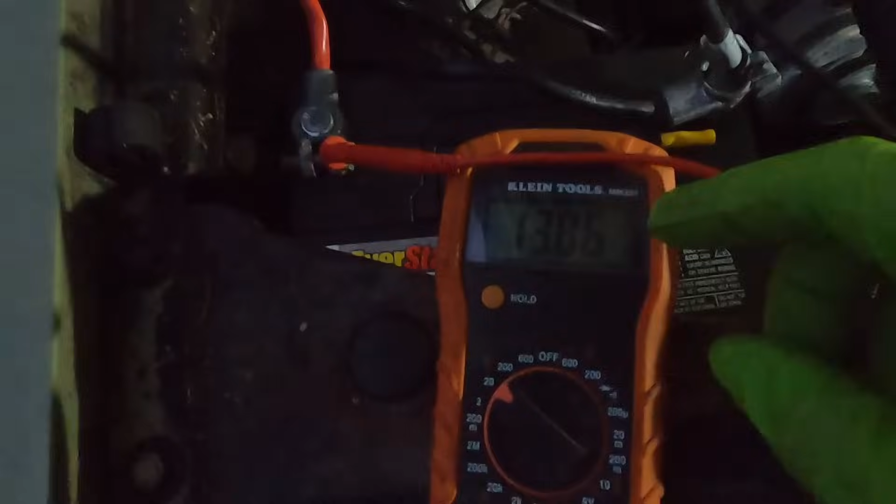All right, we plugged off that auxiliary valve. I just want to set here and idle. Oh, we're pulling not very good, but we're pulling 12.9. Oh, 13. Oh, I bet if I rev it up. So we're getting a little bit there.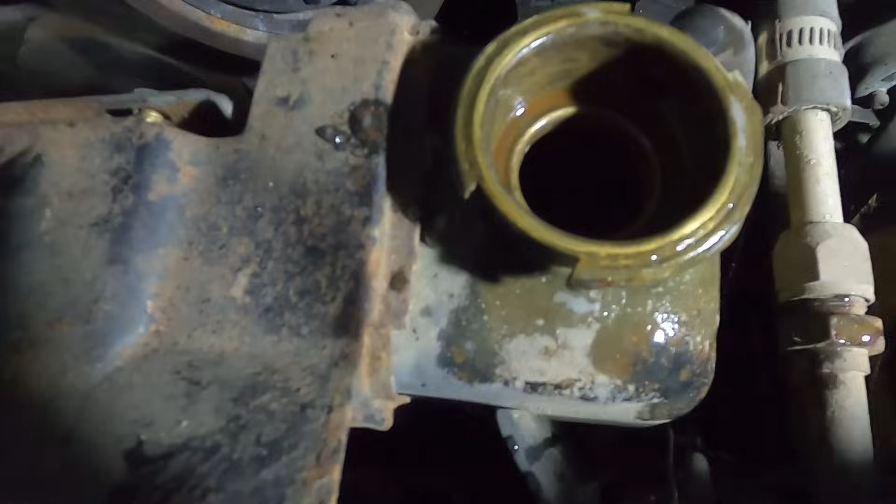Let me get some water going in here, because I know there ain't no water, it's probably done all leaked out. Well, there was something in there. Let's take a look, I just put a little bit of water in there. Well, there's something sudsy in there, I don't know what it is. It's ugly, whatever it is. All right, let me get a little more in there. All right folks, here we go.

Well, that's not as planned. All right, that's good enough for now. I'm getting a shower. All right, you know what? We'll let that go. Ooh, that's ugly.

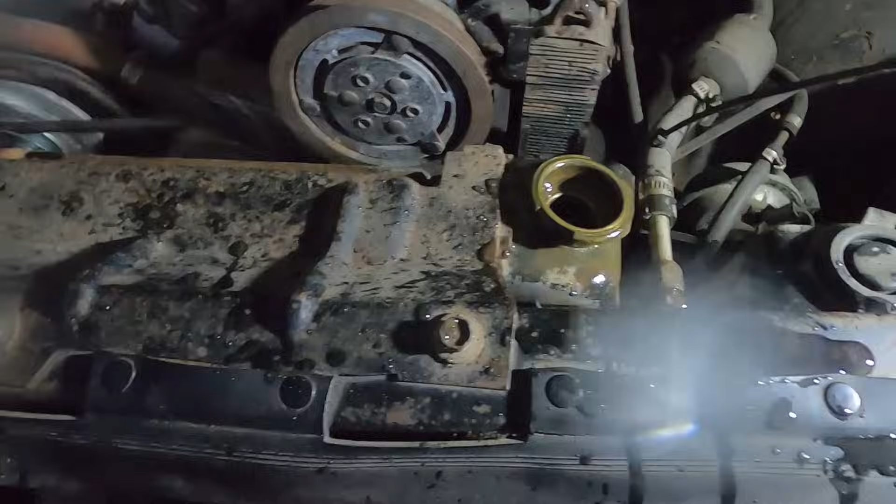All right, that is an exhaust manifold leak. If it's not, it's got one heck of a rod knock.

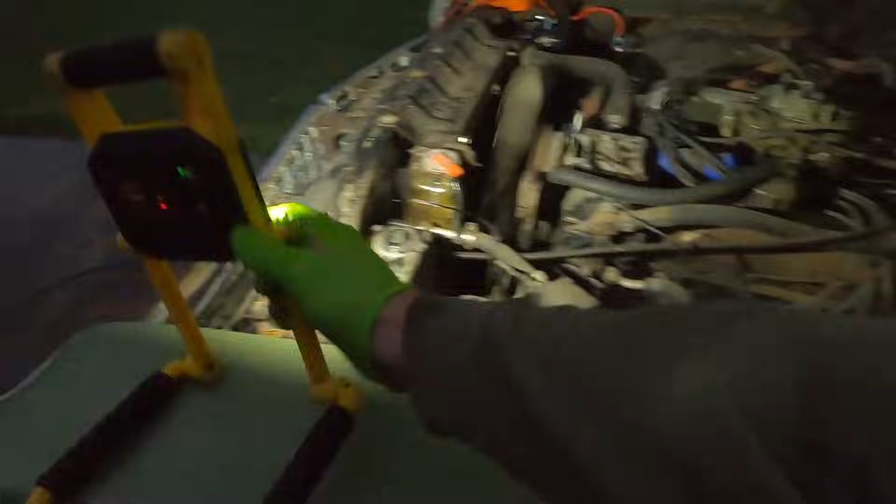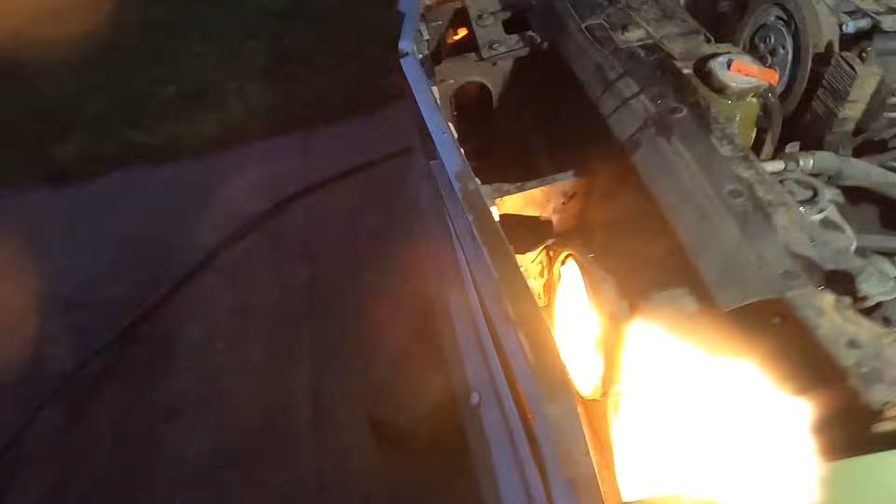All right, lights. I got no clue where the lights are, folks. Let's see if we can power some lights here. Oh, you know what? The lights are on, but no one's home, because I don't know how to flip up them lights. There we go.

All right, I'm gonna throw this bad boy in gear and hope for the best. We'll see what we got. Let's see what we got. See if it's moving. We even got, feels like brake pressure. You guys can't see nothing. I don't see no wheels turning.

Got it in like, oh, there it went. Oh, looky there. Oh, what happened? Oh, come on. Oh yeah, I bet the drums are stuck. So we're moving there, all right.

Oh, is the other side moving? I bet it is. Oh, now this side's moving. Look, it's trying. I think the drum brakes are caught up. Oh yeah, that sucker's spinning all day long.

All right, here's what we're gonna do. I'm gonna shut it off because I don't know how much fuel's in here. I'm gonna get it. I may get my wife out here to help me so we have a little light. I'm gonna get the jack off the jack stands. Let's see if this thing can move under its own power. Be right back. Woo, look at there.

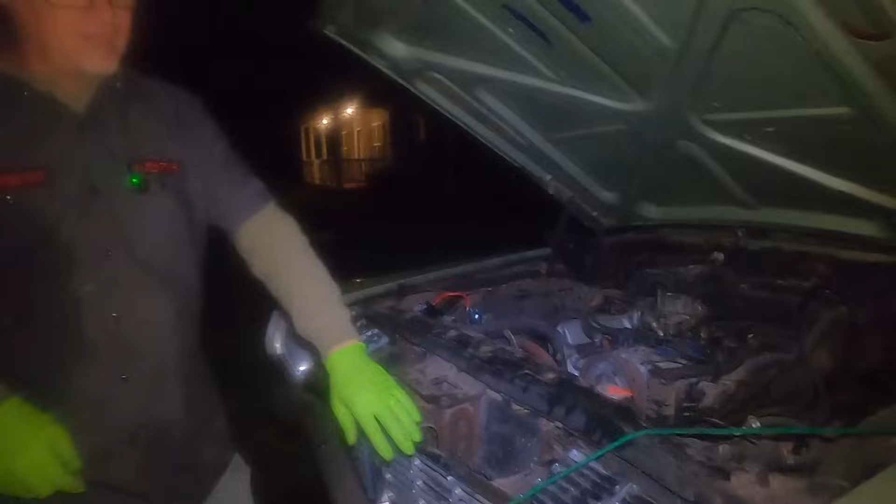Worried about me, okay. Here's what we're gonna do because I'm intent to get this video done. Okay, I'm gonna go ahead and get her started. I got the jacks off and I pulled up the lenses here so we can see the headlights.

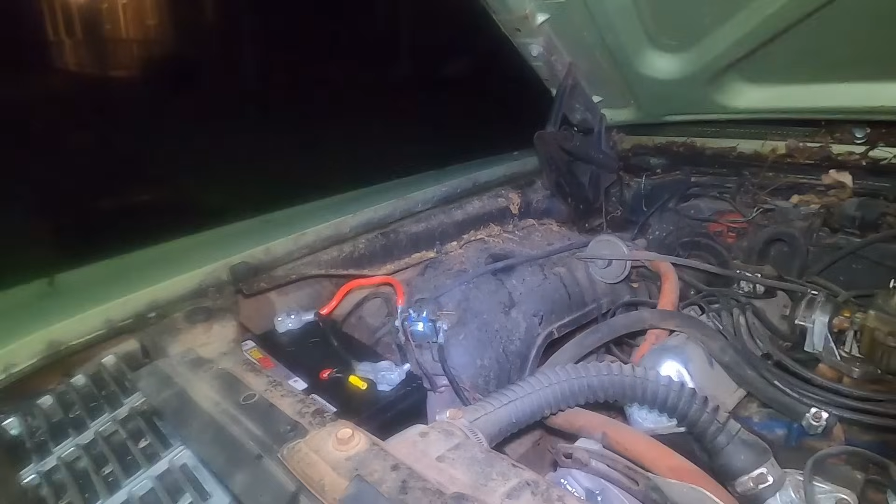Shine it over here, darling. Well, you stay right there. Just stay right there. Let me make sure I got the ignition on. And I don't. Hey, the dome light doesn't work. All right, all right.

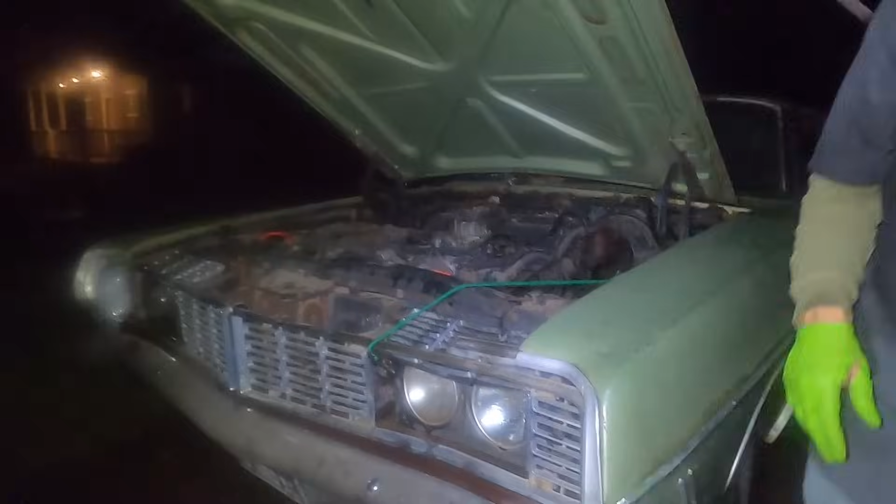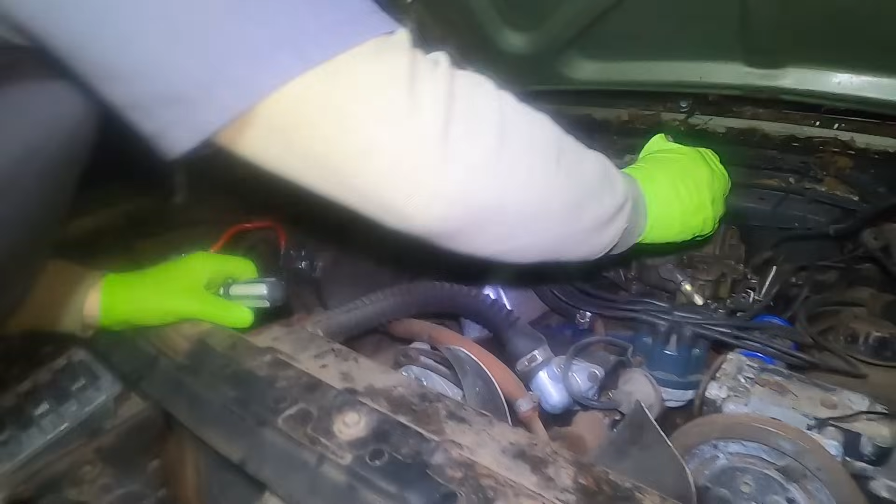Let me start it. I'll drop the hood and I'm gonna see if this bad boy moves under its own power. All right, need a light over here, darling. Just kidding. Come on, give me some light. All right, let me pump the gas. It's just electricity.

Now, why all of a sudden isn't it starting? Let me make sure the ignition's on. Tell you what, I'm gonna try starting it from inside. You just keep the camera on this. Don't put your hands in there anywhere, darling. Wonder if there's any spiders in here.

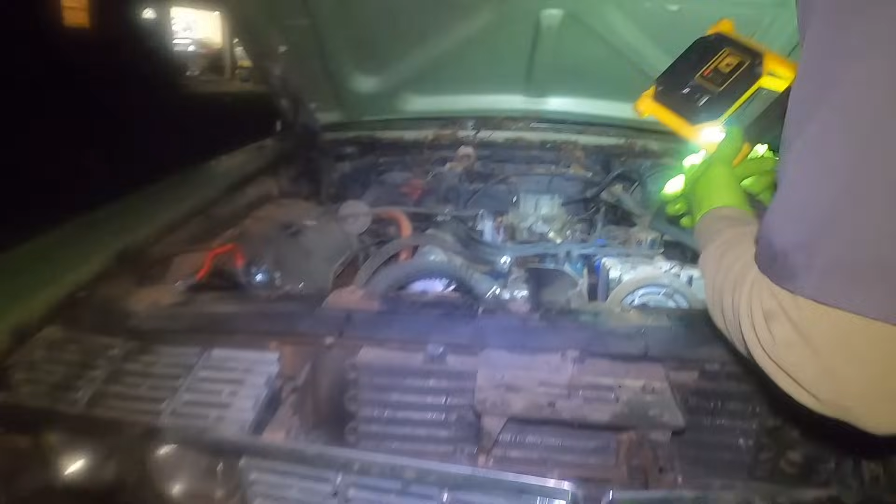All right, here, let me see that big light. Did something get disconnected? No. Coil's there, that's there. I mean, how all of a sudden is it not running now? I mean, you know what I mean? That's connected, that's tight enough. That's connected, that's tight enough. What in the world happened?

All right, let me make sure the ignition's on. Ignition's on. Oh, I wonder if it's in gear. Because I wonder if that's what's doing it. Make sure you stay clear, darling. That's park. All right, let's see what we got.

All right, you know what? You gotta know when to cut your losses. It is dark. If it makes y'all feel any better, I found a Sony 60-minute Type 1 high fidelity cassette tape in the car. Bonus round.